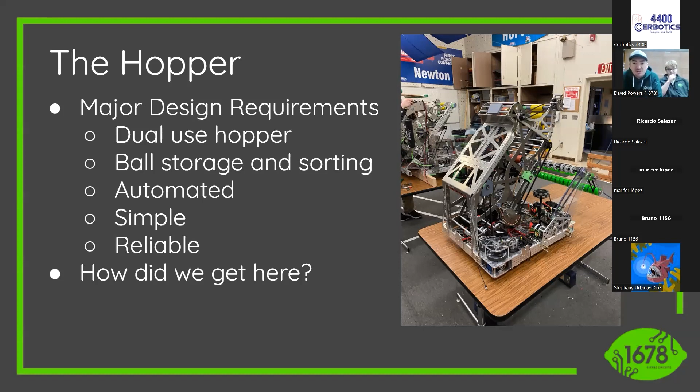So we wanted it to be dual use. We really wanted it to be something that could not only store the game pieces, but sort them. We wanted the system to be automated, so it needed to have some sensors and stuff. We wanted it to be simple, and we wanted it to be reliable. The image that's up on the screen is our competition version of it. So how did we get to this point? Where did we start?

So at the beginning of build season. Is this yours? No, that's yours, Dave.

Okay, at the beginning of build season, Citrus takes the first day. The first half of the day is solely focused on learning what the game is and how you can play the game. We really look at all of the things that you could potentially do. We don't look at the things that we are going to do. We don't decide right away what we want the robot to do or how it's going to do it. It's just listing all of the things that it could do.

And then we synthesize it down a little bit to what we think the robot should do. So not how it's going to do it, but really what it's going to do. And in this, you can see the end list; all of the things that are circled are the things that the 2022 Citrus robot was going to do.

So if you look at the storage portion down here, you can see that we wanted to make sure that we could hold the maximum amount of game pieces, and then we wanted to be able to hold them while climbing, which was a small caveat, but that was because we thought there were going to be more teams that would not climb and would instead spend the time shooting the game pieces in the last 30 seconds.

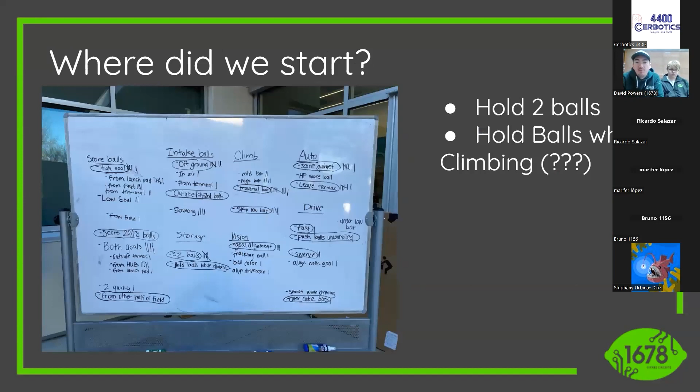And we're using all of this information to try and decide what prototypes we're going to do to accomplish all of these goals that are listed. So once we get to this point, we're really just trying to draw out some really simple, low effort, as low effort as you can, first prototypes to see how the game pieces interact with each other.

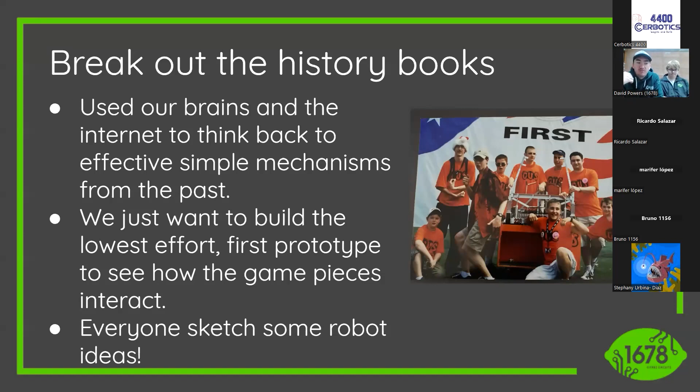And then once we've done some research and we've filled our brains with a lot of good concepts, we move on to something next we call drawing time. So basically, once we know what we're gonna do, we give everyone who does anything related to the robot a chance to come up with ideas of how we want to do it. Every group gets given pieces of paper, rulers, pencils, and graph paper, and basically just comes up with engineering type drawings for what we want the robot to do and how we're going to do it.

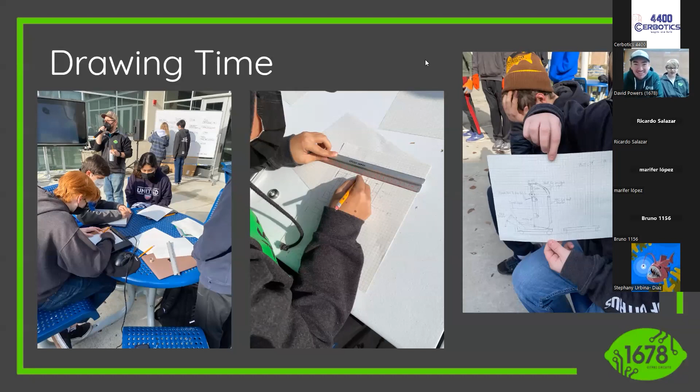So after we come up with our ideas of how we want to build our robots, we move on to really quick, low effort prototypes. Again, most of the designers were really inspired by 973. So we were like, let's just take that and make it a little bit different so we can use it for this game piece. And then we had a robot on the field, in this case, in 9 days. So we ripped it as quick as possible.

We used plywood walls for a lot of it. We used polycarb. We basically just wanted a robot on the field that could do the game at the most base level possible as quickly as possible, so our drivers could get a lot of driver practice, because we know that they're a big reason we're going to be winning.

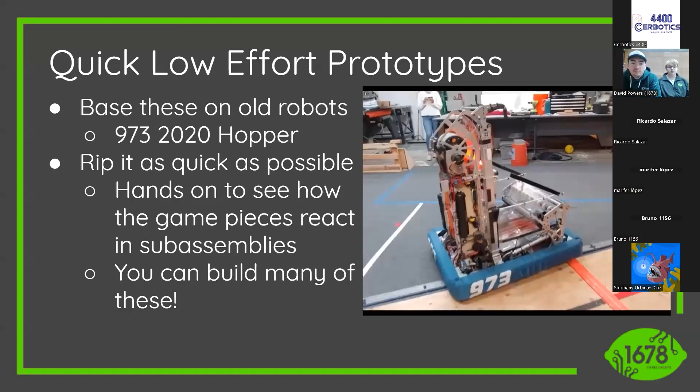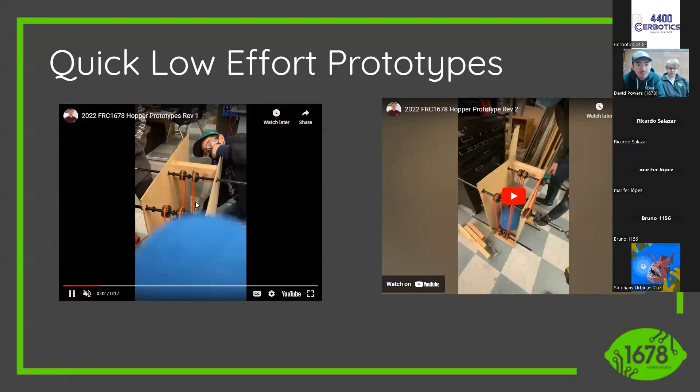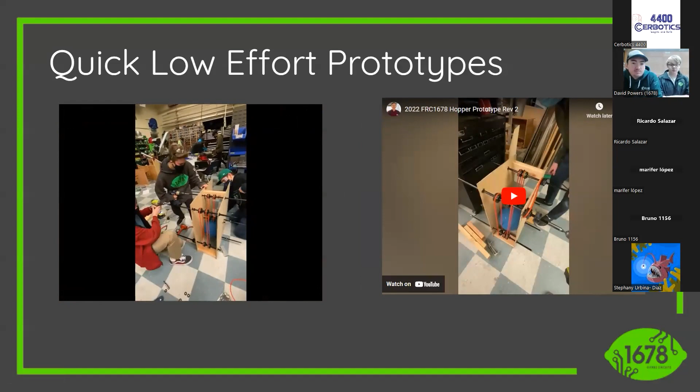So going off of that, this slide is just a couple of videos that show our super low effort prototypes. You want to talk about how we wrote those? So these are basically just proof of concepts that we did the Sunday of kickoff, just to make sure that our ideas for the 973 clone prototype would work as our alpha bot. We're making sure that if we put the thing in a polycord tunnel, the polycord will bring it all the way up, and then we can move from there into a shooter and it'll work well. We're basically just making sure that our ideas function, so then we can move into alpha.

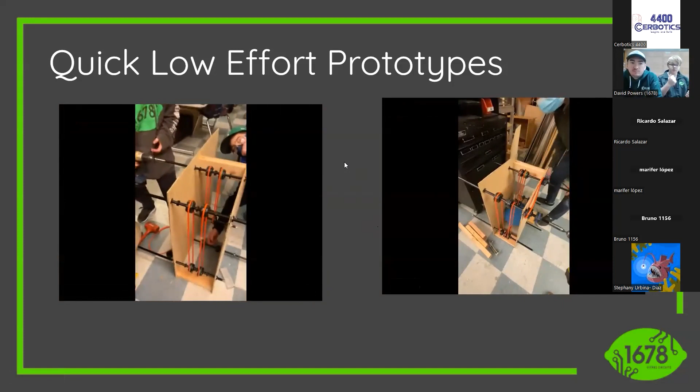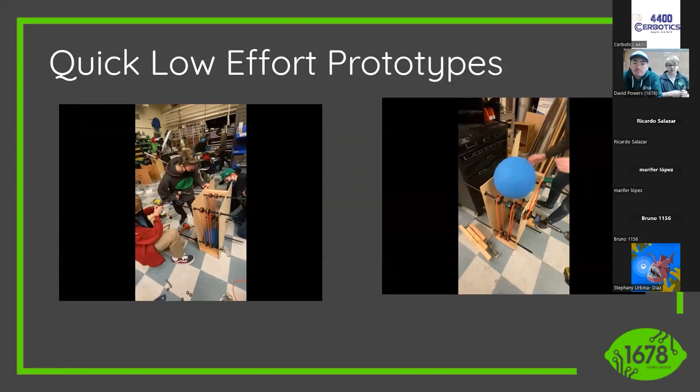These can be really simple. They don't have to take a lot of time. In this case, we literally drilled holes for a shaft to go through, put a long shaft through, put drills on the shaft, and then just spun it around. No machining went into this except for drilling holes in plywood that we had lying around, in this case from last year's tower for scoring. So this is literally just take plywood, drill some holes, and then from there we just make sure ideas work.

And then after that, we moved on to our alpha bot, and from there we were finding failure points pretty much off the bat, just because it was not the most reliable robot. So we learned that C2C was really important, because we were having a lot of issues with game pieces coming off of belts because it was too tight in some places and too loose in some places. So you need C2C. Explain the C2C. Yeah. So the center to center of the polycord there, they were too tight in some places.

So the ball would literally bring the polycord off of the belt. So you can see here too, in this case, that was too loose. So basically as it spun, it spun the polycord off of it. So we learned pretty early on, if we're going to do polycord, we're going to have some major problems with it in terms of making sure our C2C is right, which is a reason we ended up not doing polycord in future versions.

Yeah, so I think it's important to know, this was just a question in there: how do we define low effort? So it's mostly just in my brain, kind of defining it as the smallest amount of work you possibly can do to get something to just see how the concept is going to work. So when we say low effort, it's just really, really simple materials to work with.

So like these thin pieces of wood that we can just drill through, or just drill holes and throw a bearing in it or something. We're not worried about it lasting any longer than the 5 minutes that we're going to do testing with it. It's basically just how little time can you put into something and make it and get some answers and learn the failure points that you're going to see.

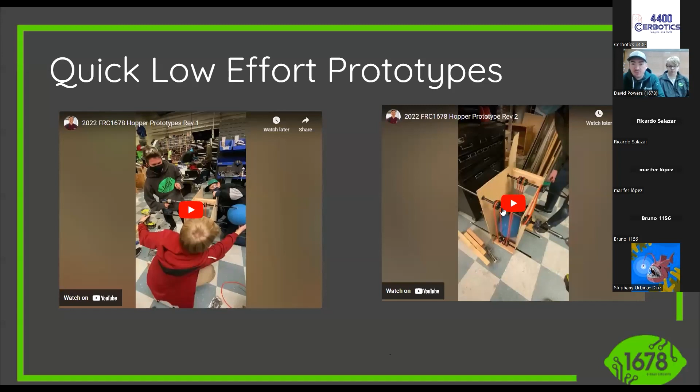So a lot of the big time with this is the geometries that we're trying to figure out. So one of the big failure points that we're trying to learn is the proper center to centers and the proper polycord that we're going to use, and how the balls interact with the different wheels that you can use and the different materials.

So on this prototype, it's not just going to be we're going to do the polycord and try it. Maybe we're going to try and stick a wheel on it, or a stealth wheel, or one of the star wheels, as you'll see in the future. You can use this to test a bunch of different things, so you have a really good understanding of what is going to work.

Yeah. And then throughout this process, we also found a couple other failure points. A big one was speed. The ball was either coming out way too slow into the shooter or way too fast. So that helped us find the right speed to bring the ball up. We also found out that to be able to bring the ball fully up and actually have contact the entire time, we needed a feeder wheel as well, which basically meant that

We're giving a presentation to like 200 people right now. Yeah. Sorry, we're actively having a meeting right now.

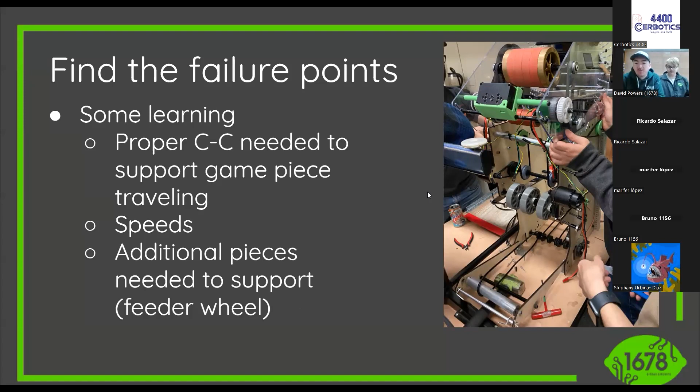Yeah, and then so basically we're like, okay, to support this project, we need a feeder wheel there because the feeder wheel gives the ball that support to then come up through the rest of the system. I think this portion of the prototype looks a little crazy because the shooter prototype is also on it, but unfortunately, I missed out on capturing the process, it happened so quick. So we go from this version of it, right?

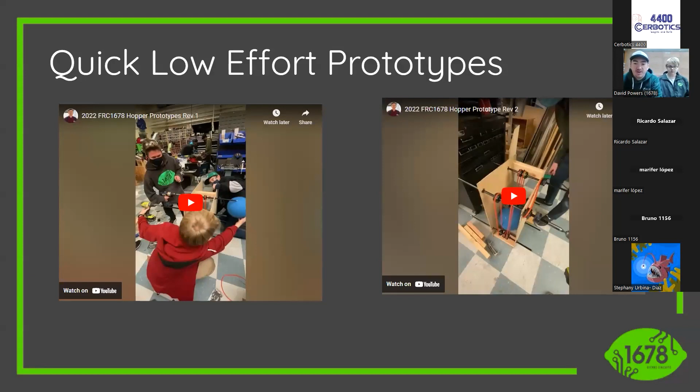And then at this point, this is really just doing some mild 2D sketching to get geometries and then just tracing them. And they don't have to be perfect. So then once we know what the geometries need to be, we'll take all of that drawing and put it in an Onshape model to get it a little bit more defined.

And in that Onshape model, you can rip these. We have a nice laser cutter that we use to do this, but you can really do this with just hand sketching once you have the proper geometries. And your next version doesn't need to be as advanced as this. I think we skip a couple steps that most teams would do, but the whole idea of this next version is you really just want to build one that's a little bit higher fidelity, more defined and closer to what you're going to want to see in the final version that's going to go on the competition robot.

So these C2Cs were cut by a machine, so they're within a good tolerance. And these are the wheels that we're actually going to use. And this is the path forward that we're actually going to use.

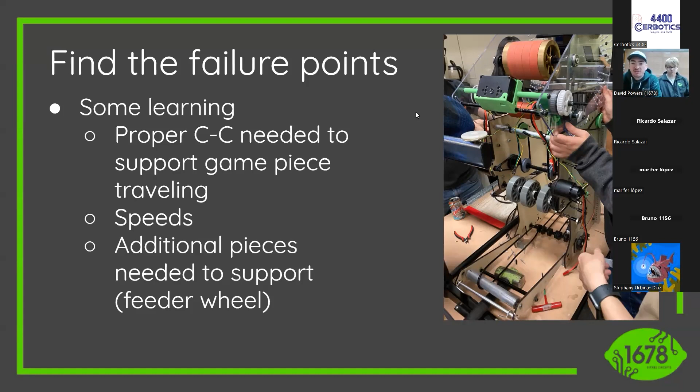This is Maria. Thank you.

Okay, so then this next portion of it, once we have this prototype, and like I mentioned, this has the shooter prototype on it, but just imagine it's just this portion of it, just this L.

Okay, just that portion of it. We're going to now use this prototype so we can really better understand the limitations and make some mild adjustments to try and get it to the point where it's going to be something that's going to perform very well on field. So this stuff is really cool because you can then give yourself the opportunity to support yourself in the discovery. And if you give yourself enough time playing with these prototypes, you can define a really good list of reasons why this prototype is good and why it's bad.

And the more important part, I think, is understanding the limits given the context. When you first build something, you don't really know what it is and isn't capable of. So you're going to want to run a bunch of game pieces through this. It's a very simple thing, but you're going to want to see and document every little pinch point, where the game piece gets hung up, where it goes through really well, what makes it go through really well, and how we can make some small adjustments.

A good amount of your time should be on these medium fidelity prototypes that give you a good opportunity to support yourself in the discovery of all of the things that are going to make it good and make it bad. Once you have a really good understanding of that, then you can start thinking about tuning it and improving the performance of it, I guess. It really should be in order of magnitude. You build this medium low fidelity prototype, and then you really want to understand it and make it as reliable as possible in terms of accomplishing the goal.

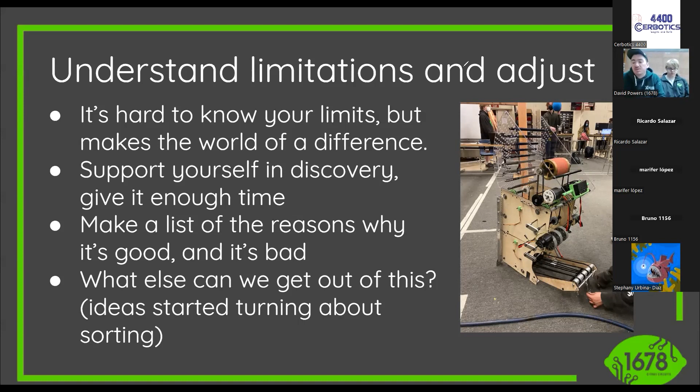And this goal was to take the game piece from the front of the robot to the shooter of the robot. If you can get it to perform that 98% of the time, then that's a good understanding that, okay, we've pushed this prototype to the point where we know it's going to be a super reliable system.

We're going to have to move a little bit quicker. So,

Okay, so at this point, we've done a pretty good job with this prototype. This actual prototype goes on our alpha robot that we do the 5-ball with. It's hit the point where it's working very well and we're very happy with it. So now we're asking ourselves, okay, what can we do to get a little bit more out of it? We saw some of the limitations in terms of speed. It's at its max capability, but it's still not very fast. It still doesn't solve the sorting issue. So all throughout this time, we're doing as much as we can to understand what everybody else is doing and do some research.

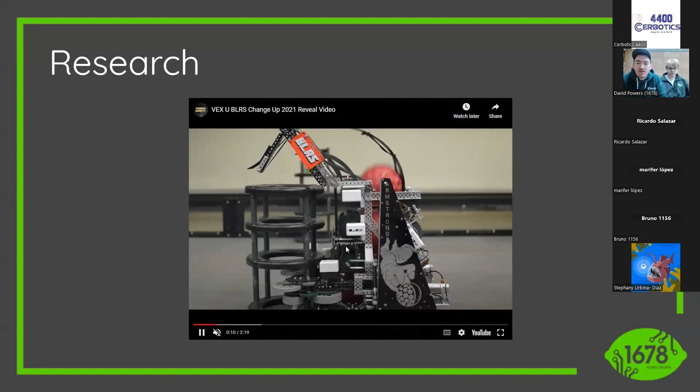This next portion is a cool video that shows where the idea of the sorter within the hopper was born from. Just a small bit of context: at AFT, me and Mike and a few other mentors work, and there's a couple Citrus alumni that work there. One of the Citrus alumni was big in the VEX robotics world for a while, knew of this robot, was very familiar with this game, and was like, oh, there were a couple cool robots that had automatic sorters on them.

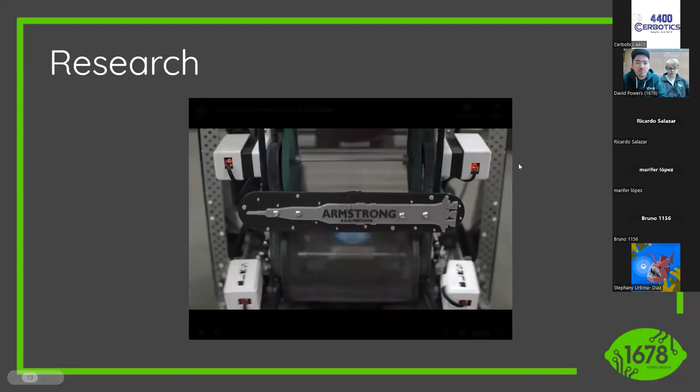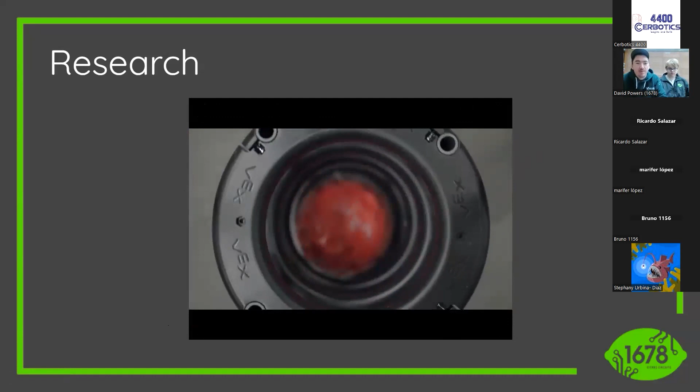So he pulls up this video, and it's kind of hard to see, but you can see it really quickly. They intake the wrong color ball and then they just shoot it, they spit it out the back. We're watching this video and we're like, wait a second, that's kind of brilliant. That's going to solve our sorting issue. That's going to facilitate us.

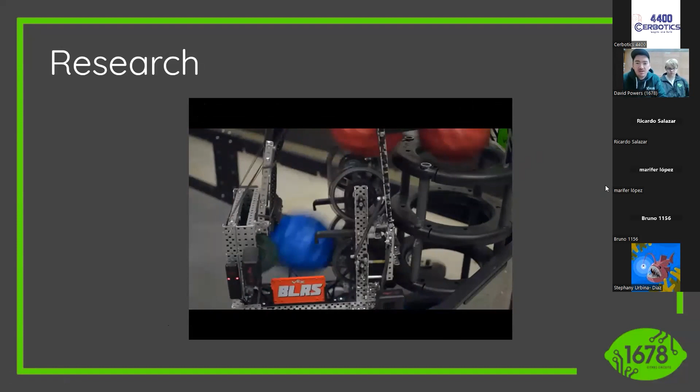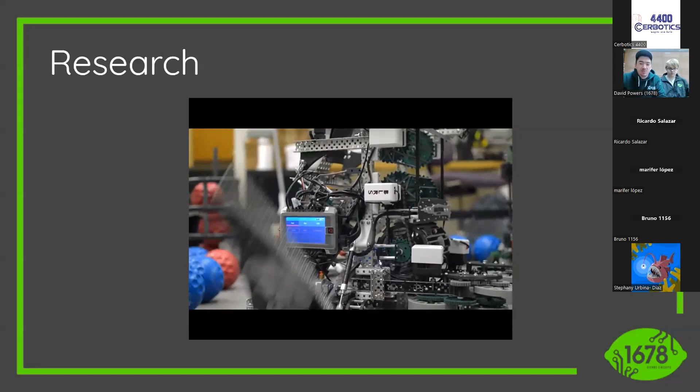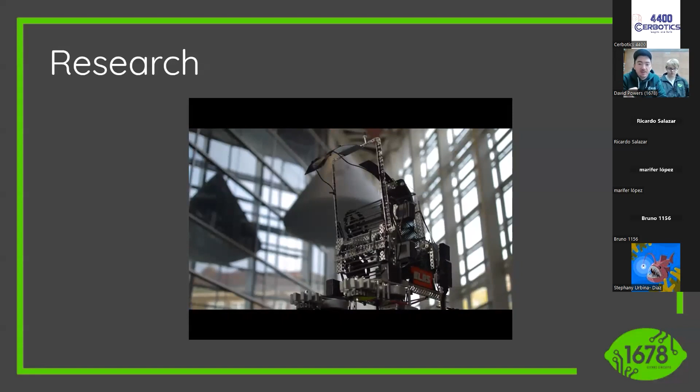We really are understanding at this point that we think the game is going to be won in the amount of time you take to obtain the game pieces. At the high level and at most levels, it's going to take the same amount of time to score the game pieces. But if you can get the game pieces faster than anybody else, you're going to do a lot better. So we see this concept where it has the ball outtake that goes straight through the robot.

And we're like, oh, that's a cool concept. We should test that. So we move forward and we kind of get to this point now where we're almost resetting the cycle, right? We have that whole alpha robot done and it's building, but now we want to build a better one. We want to rescope our understanding of what's possible, and we want to build one that has more capabilities. So in this one, you can see this is our third iteration of it.

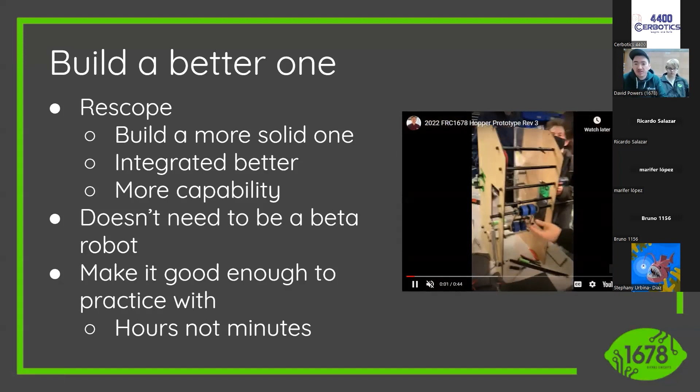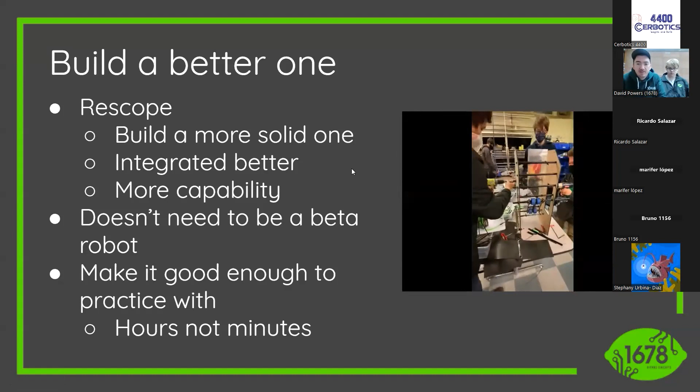And we actually built in this concept of having an outtake that's built into the hopper. So you can see here, it's just a little flap. Instead of that being a flat back wall of your hopper, it's just a little flap that is going to open to either let the ball through or close to make the ball go up to the shooter. And in this one, we kind of made it into our beta robot that you'll see in a minute, but it doesn't really have to be.

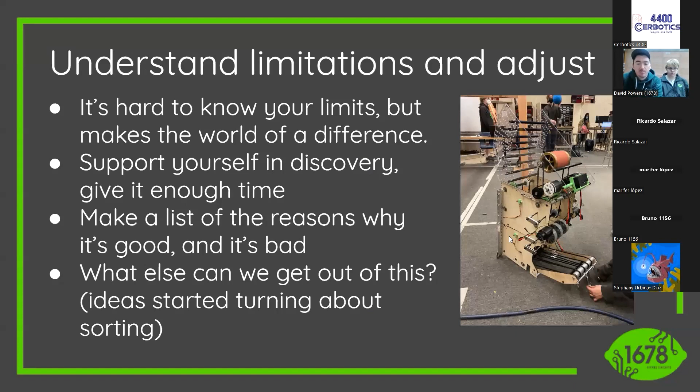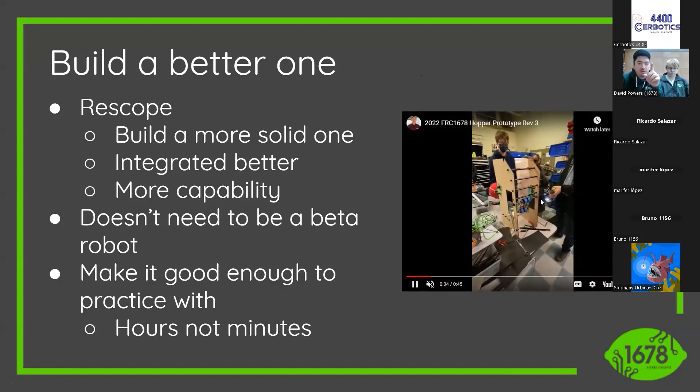You can kind of go through the process where you're building a prototype like this version of it, but with just a little bit more capability. We could have just built this with the little flap on it and it would have done everything that we needed it to do. So now we're kind of restarting that cycle of build a really low fidelity prototype, then build one that's a little bit more advanced. And this is our one that's a little bit more advanced. The rest of the architecture we have a little bit more defined in our brain, so we integrate this portion of it a little bit.

So this was the hopper subsystem, and you can see we start getting a little overly aggressive with mounting our motors lower. And this had the whole structure of what the climber was going to go off of, but it really could have just lived as this prototype to help us discover everything we needed to do. And this could be done out of wood. We started to do it out of metal because we were running longer and longer practice times with it. I don't think at this point we understood that this was going to potentially be only a beta robot. We thought this could have been the competition robot. So that's when we started doing that.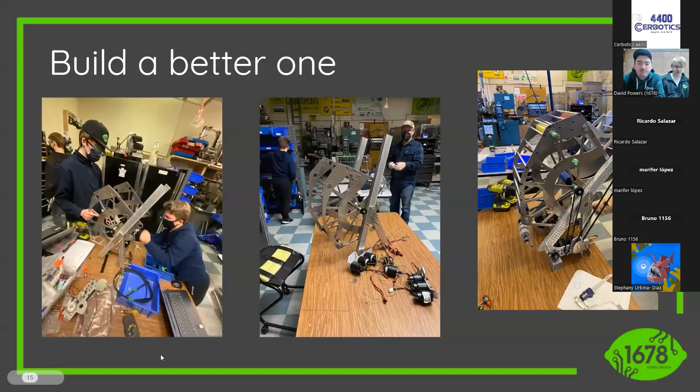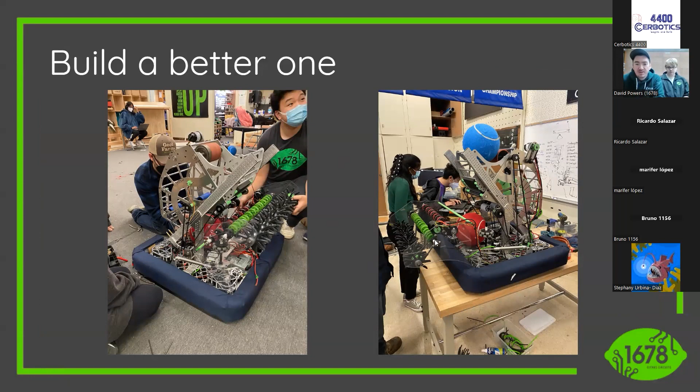So here you can see it's integrated a little bit more, and this hopper is integrated. We put it on one of our practice drivetrains, and it had the intake on it, and the shooter was starting to come together. Once you have a basic robot, or even just a prototype, you really just want to make it do the thing that it's going to do over and over and over again. A lot of that just comes down to hours, not minutes. You want to be putting it through its paces for long periods of time.

It's when you really start to find out the failure modes you're going to be dealing with, especially doing it in real match situations. So even for this indexer, if you just put it on a cart and push that forward into balls and it just has to sort them, it'll be a really great way to make sure that what you're doing will do what you need it to do well enough. Basically, you want to break it, you want to figure out how it will break, and then you want to fix it so it can't break again.

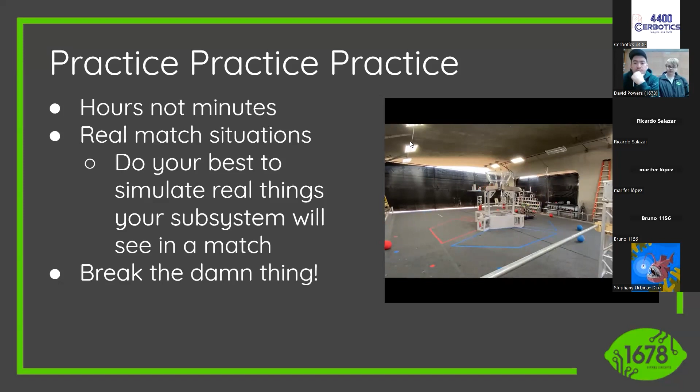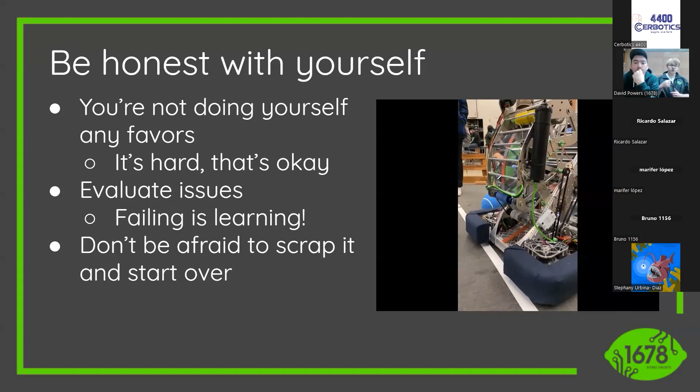And then once you have your mechanism and you've run it through its paces, at a certain point, if it's not working, it's just not going to work. So you have to be honest with yourself. You have to be like, okay, this mechanism as we currently have it will not do the job that it needs to do. For this flap, its activation time was just too slow. We couldn't get the ball to come out. It would just go up through because the activation time on the piston was too slow for us to actually sort it correctly. So we had to be like, okay, this functionally cannot work.

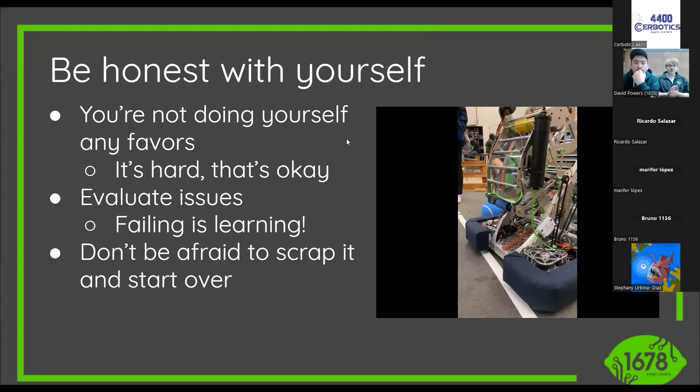We have to just scrap that idea and start over again. It's okay to fail. We do it a lot. And we just had to be like, we can't make this work. We're going to come up with a new idea to do the same thing.

Yeah, so you can see in this video, there was a fair bit of latency between the color sensor and the actual mechanism itself. So you can see the ball comes in, then it crosses the color sensor threshold and it gets the reading. And then by the time it fires the pistons and tries to retract it, you can see the ball has already moved past it enough that, we were taking a bunch of slow-mo videos and we were like, oh, it's not gonna work.

So at that point, you have to be honest with yourself. I kind of don't like the fail faster mantra. It's important, but it's not really ever failing. Failing is just learning. You're just trying to learn faster, not fail faster. You're trying to put all of your effort into facilitating as much learning as you possibly can, as fast as you can. And that goes along with being willing to try all of these different things in quick succession. It's really learning faster, not failing faster.

So then we had done that prototype and we realized that it wasn't going to work. So we went back to square one and started trying to develop some concepts where we could still use a sorter, but it needed to not have the latency that the flap did. So we were trying to think of systems that could work a lot quicker. And rewatching the video, we realized that there's no flap on that robot. It's actually just wheels spinning in different directions. So we wanted to test that.

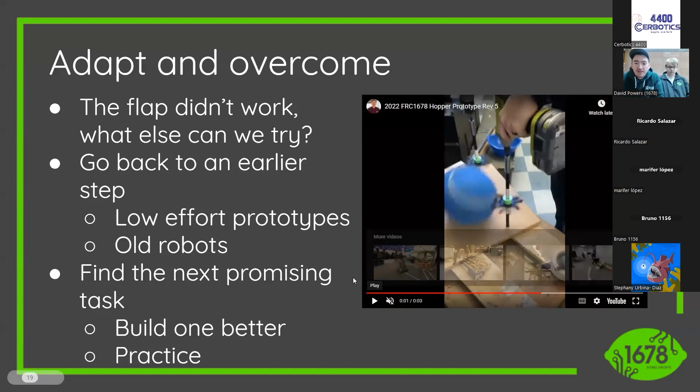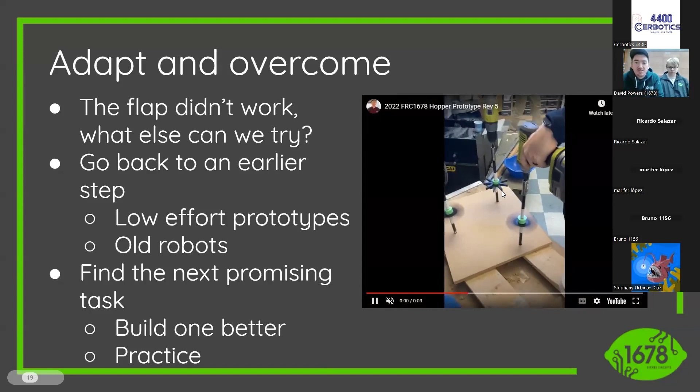When I was talking about the low effort prototypes earlier, somebody had asked the question, and really this is my idea of the lowest effort prototype that you could possibly do. It is 3 drills with 3 shafts and there's 3 holes on this. We drew some very basic geometry and then we're just testing to see what the game piece does when it goes through. So here we are testing to see if we change the direction of this one, could we get it to sort the ball to go to different places.

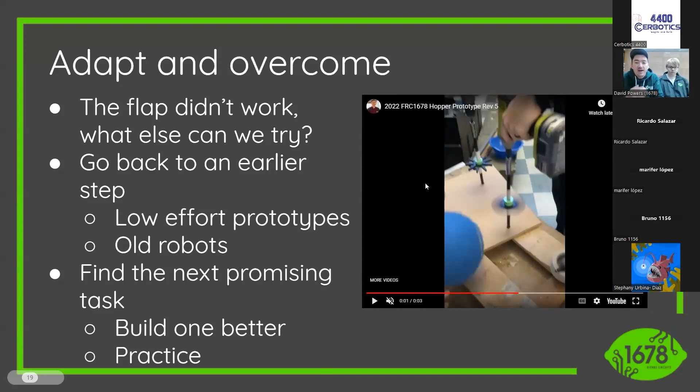And once you have that in your brain, you're like, okay, that concept works. Now let's build one that's a little bit better, and then we're going to practice with it. So here's our one that's a little bit better. This is the exact same geometry, and you can see it's got 3 drills on it. It's just 2 pieces of metal now, so it's a little bit higher fidelity. And you can see we're just changing the direction of this wheel that's spinning.

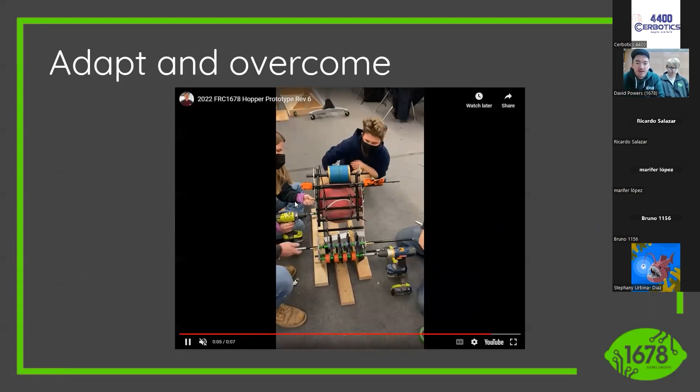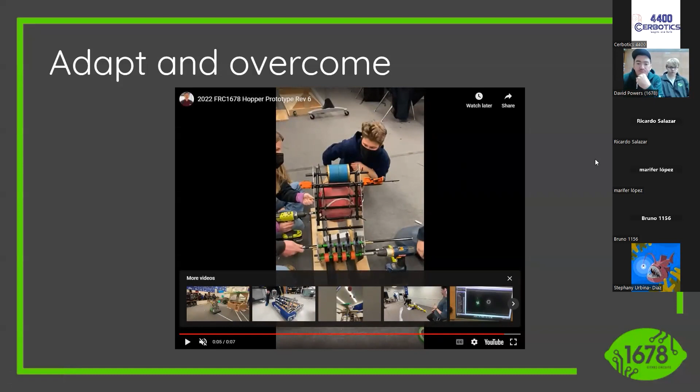So you draw some 2D CAD and you can make this out of wood, and you can do most of this by hand, setting all of your geometries, but we're just testing how the star wheels are working, the different materials on this kicker wheel, the speeds that we're going to need to run this at, and whether the idea of passing the ball through there is going to work. And then at this point we're putting a ton of hours into testing all of this as much as we can. Once we built this prototype, we were pretty confident that we were going to be able to succeed in our goal of having this sorter on the robot.

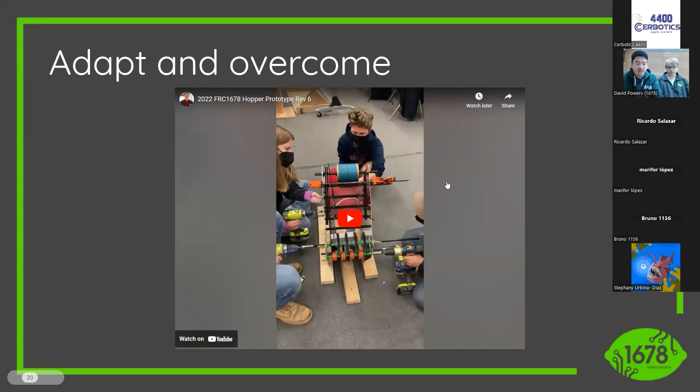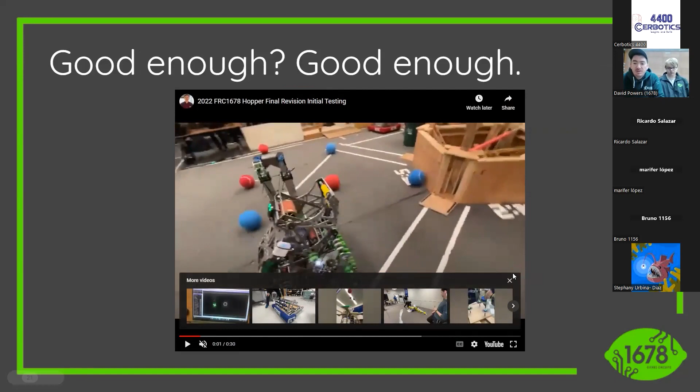And then at this point, you get to a moment where you're doing your testing. After we had run this test, you sit there, you talk with the students and the mentors, and you're like, okay, this is good enough, right? This is going to accomplish our goals. So then we're building the next version of it. This robot right here was our practice robot. Unfortunately, I don't have a ton of pictures from between when we finished the high fidelity prototype of the comp robot to when we finished this version of it.

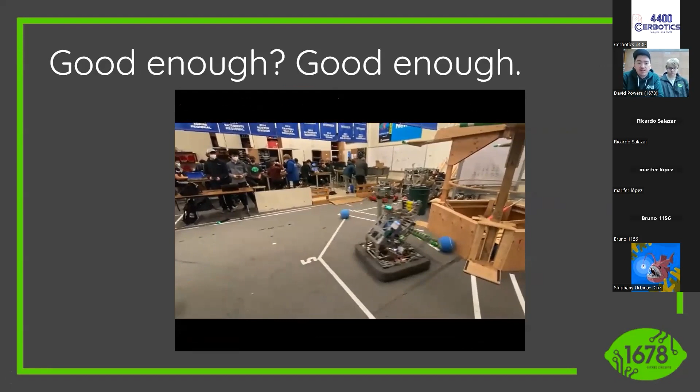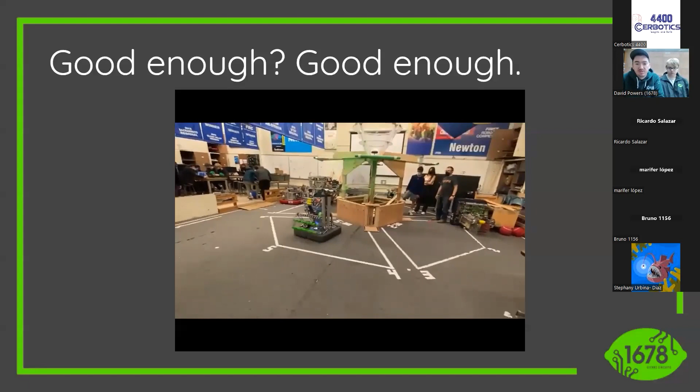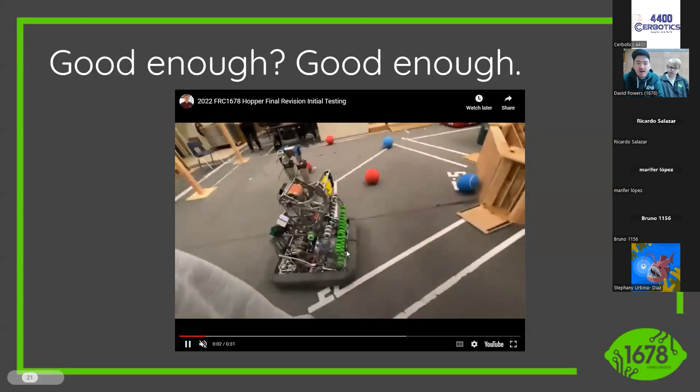But here you can see that this is basically the same system, all the same geometries, just built into the hopper that's a little bit more defined. And I think this was week 3, 4. Probably week 4 of build season. Yeah. So at this point, the construction of this is very simple, where it's just some flat pieces of sheet metal on some 1x1s and stuff.

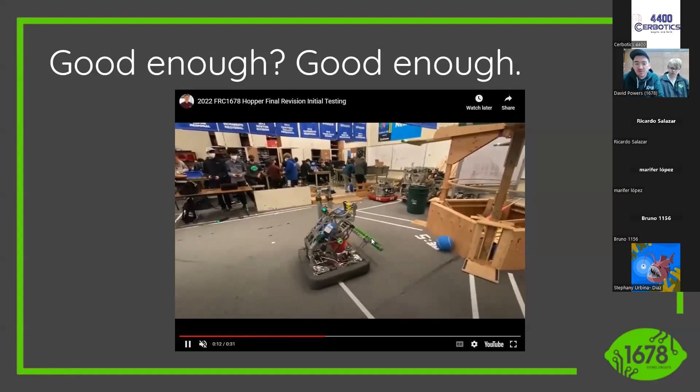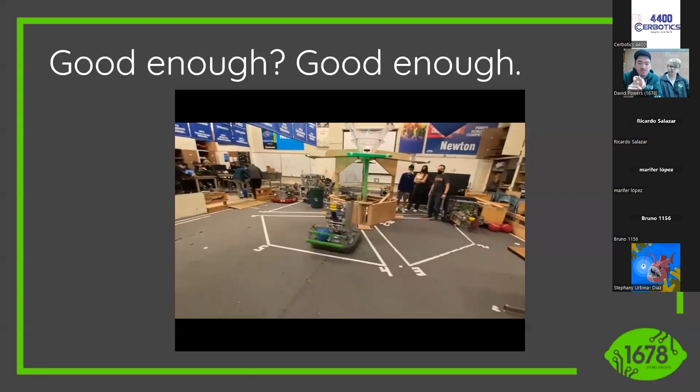But all of the major geometries, like the building of this is relatively simple and goes relatively quick because you know what materials you're going to use for all the wheels. You've done all of that testing. You know what speeds it needs to run at. You know all of the C2Cs, the center to centers, and the geometries that you need to do. And at this point, then it's just putting it all together and helping integrate it and trying to develop a system that's very simple.

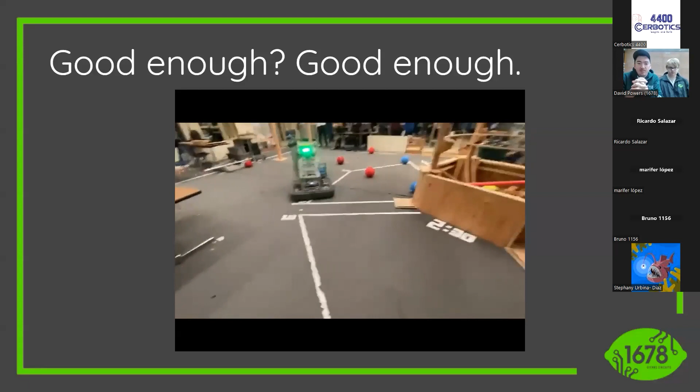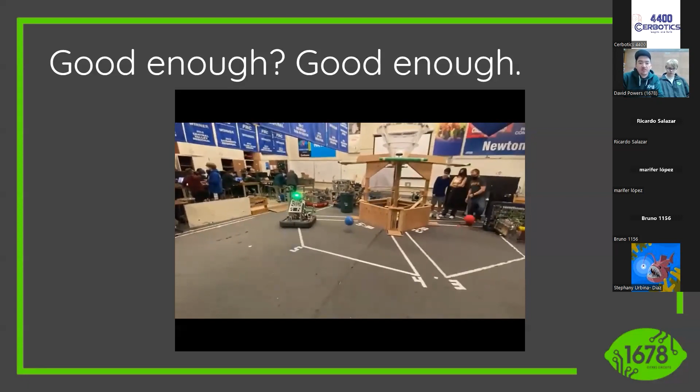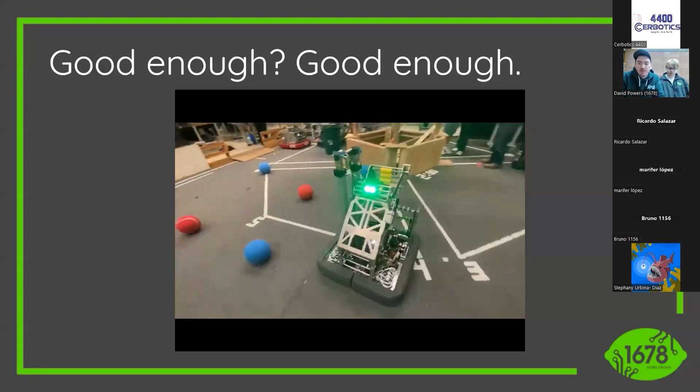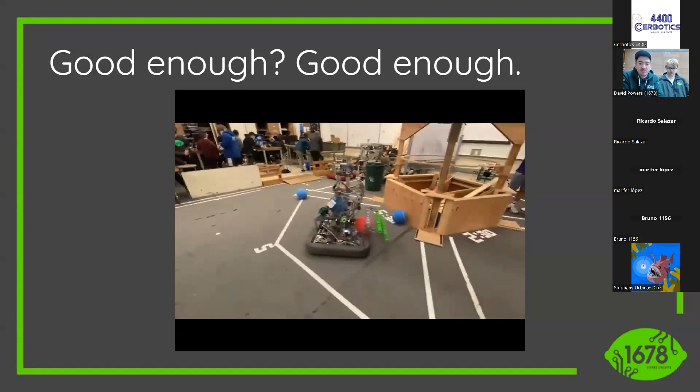So yeah, at this point, you can kind of see how when you're building stuff like this, and I think sometimes it's exaggerated because it's Citrus and we move through things very quickly. But there's no reason that any team can't implement this strategy of just low fidelity prototype, build one that's a little bit better, and then build one that's even better that can go on the competition robot. I really like to look at prototypes as kind of a progression where you're starting with the simplest possible thing that you can do, and then you're slowly making your prototype get to the point where it can go on the competition robot.

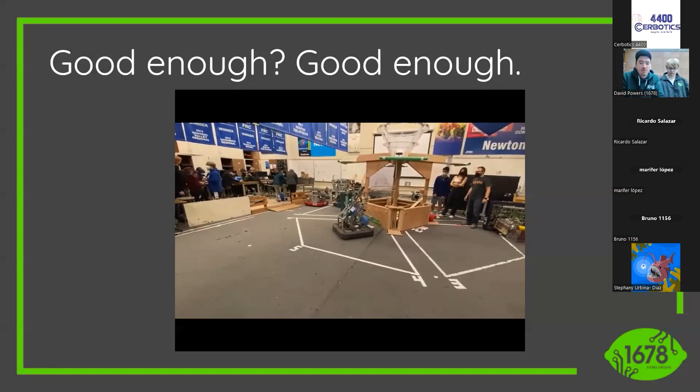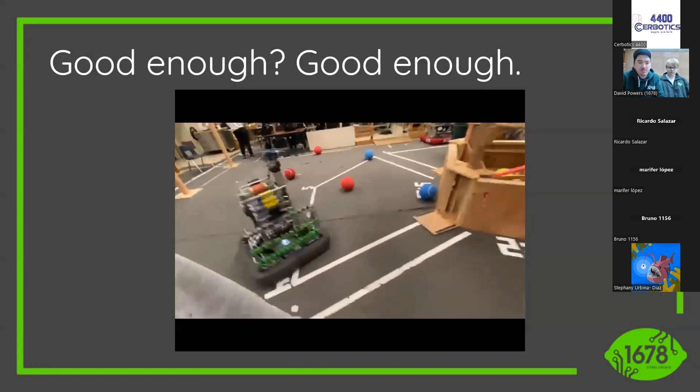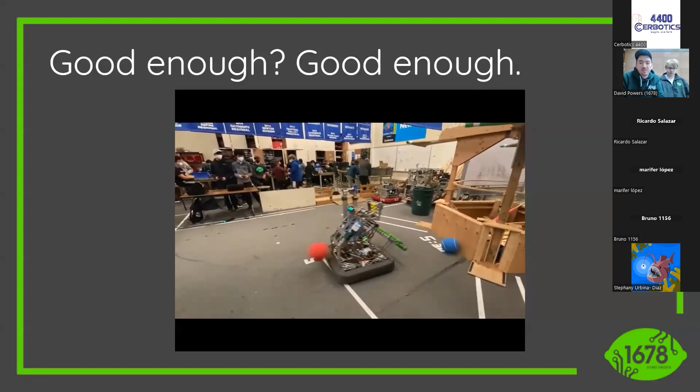You can kind of see throughout this procedure that we're just following the roadmap of: build a very simple one to test all of these concepts, and then build one that's a little bit higher fidelity that we can actually use for an extended amount of time. An FRC life cycle is in tens or hundreds of hours, not tens of thousands of hours. So you don't need to overkill the engineering of it, just get an understanding of the boundaries of it. So let's see what else.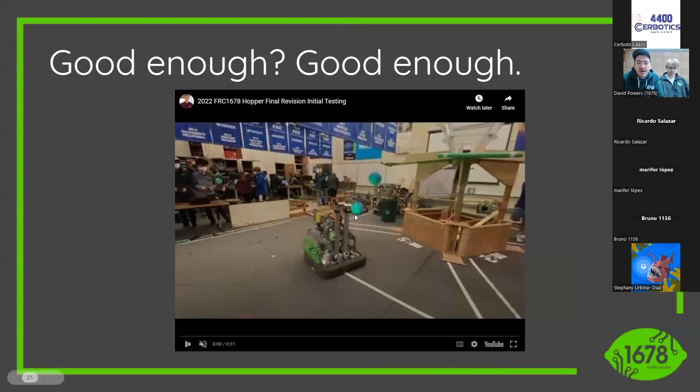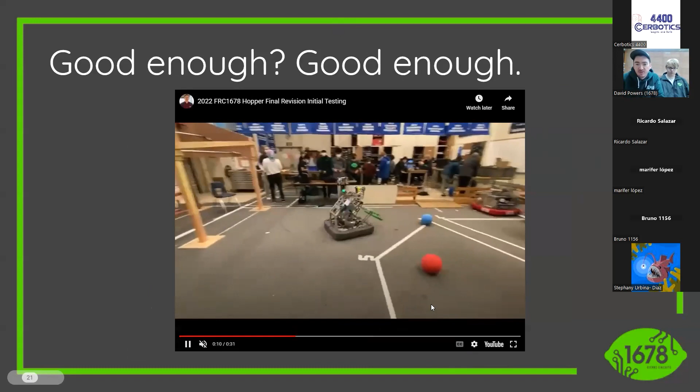And then at this point, there's no reason that you need to stop at something like this, right? For us, we are very happy with the hopper prototype, but if you watch this video, you can see there's some things that are still hanging up. I believe it's right here, you can see the ball kind of gets hung up before it gets to the singulator.

So we're continuing this process throughout the entire year, literally the entire year, even hours before we leave for champs, we're always trying to make things incrementally better. And there's no reason to stop now that there's no bag or crate. Well, some teams unfortunately have to ship the robot, but you can still do off-robot continuation of individual modular subsystems, and then bring them with you.

And the important thing to realize is, it may seem like an intimidating process when you watch how quickly Citrus can go through this stuff, but the students and the mentors are no smarter than all of the rest of the teams. It's just building that foundation and then practicing as much as you possibly can. And the more you practice this low fidelity, mid-grade fidelity, competition version of it, the faster you're going to be able to get with the cycles. At this point, Citrus has done hundreds, if not thousands of these cycles, and it's just gotten to the point where it moves very quickly.

So it's important to not get discouraged if it takes a long time to get through some of the cycles when you first start. Just understand that that's part of the process of learning how to be very good at this stuff. It'll take some time, but you'll get to the point where it'll feel like a very smooth system and everybody will be thinking uniformly in line in terms of testing and doing practice.